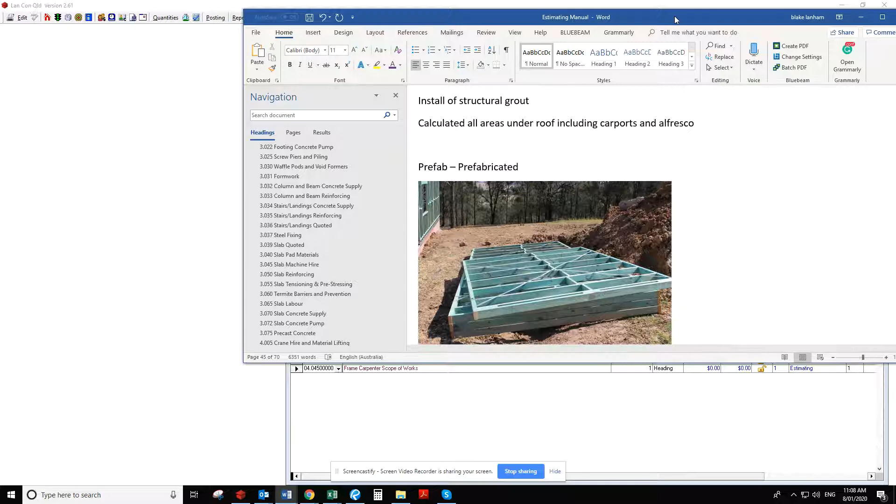A prefabricated frame is one that comes out in sections. It's much faster to build the house frame on site, so the labour costs are lower, but it's slightly more to purchase in the frame timber cost centre.

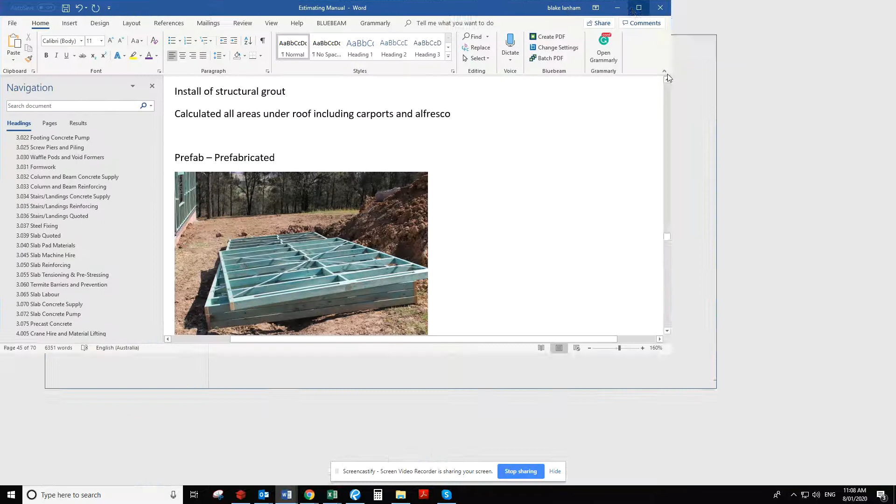The alternative is stick framing, where all the panels are individually cut on site and installed. This is a much better product for complex building sites, particularly when there are very different levels.

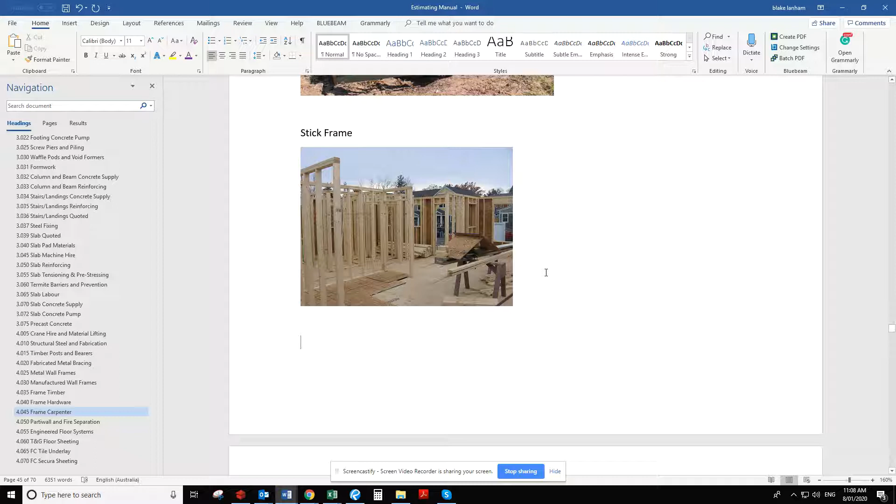This allows the carpenters to put the frames together. It does take slightly longer, but it's cheaper from a material point of view, though higher from a labour cost.

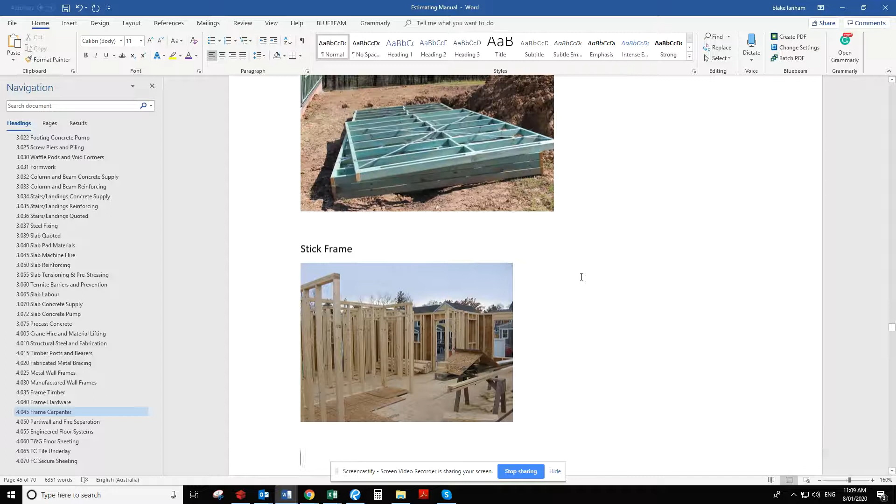Sometimes when you have to make modifications to something that's already prefabricated, it can be quite tricky and take a lot of time. So when we've got complex sites, sometimes we go stick frame. As a general rule for the Lan Con standard homes, we just go prefabricated or prefab frames.

You'll see we have quotes here for prefab lower. This house is 2-storey, so it has a floor system, a prefab upper, and then roof trusses. So if we go to the Frame Carpenter purchase order...

Here we'll just double check this bill of quantities. This one was done up by the sales estimator for a project. Now that we've actually come to construction, we just need to double check these quantities.

On this particular house, we have quite a few different levels. So the first section of prefab we'll calculate at 2700, and the next section we will calculate at a higher rate. Upstairs is all the same through the middle, except for this top parapet here.

So the first item is the lower story frame up to 2700 high. This is taken from this area at the front here.

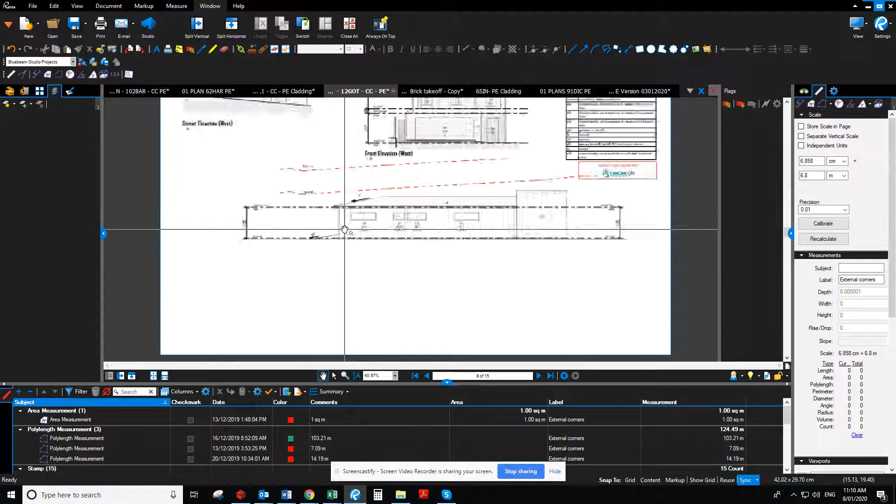Now to set up your scale on Bluebeam, you just hit Store Scale in Page Calibrate and click on 2 points, and it's 2.59.

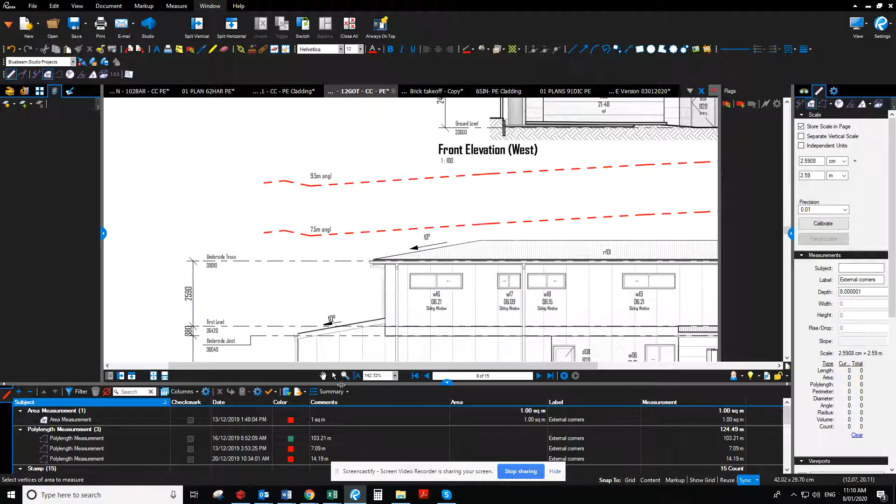Now this back section here, you can see from this point to this point is as per plan. So it's always good to just double check that the plan is correct.

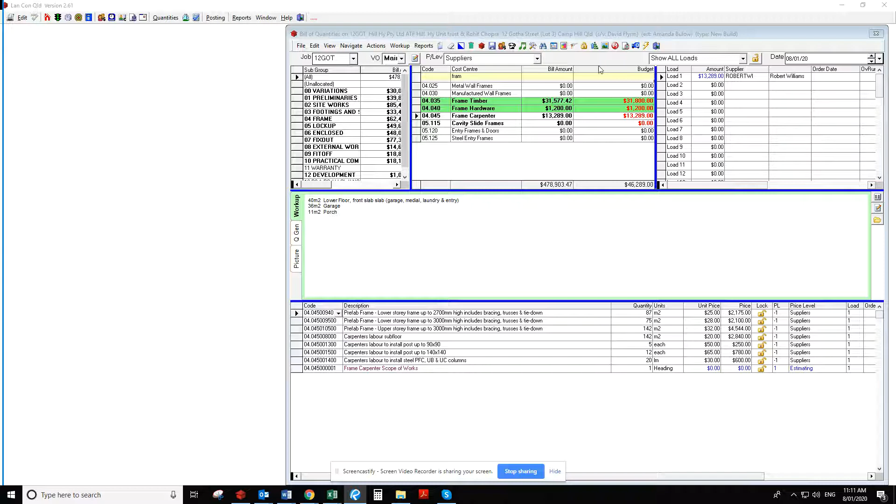So we'll have to do the lower section at a higher rate, which the sales estimator has put in as 3. That is actually the highest standard rate for this one, so I agree with that.

So what we'll do is go to the ground floor plan and double check this area. I've already got a scale saved on this page because I've done previous estimates.

So when you're doing this measurement, you want to take all areas under roof. If you see this outdoor area is all covered, that needs to be included in your calculation, because it covers any of the trusses in this particular outdoor area.

You can see here that it's under a roof line. So we don't pay separately to install frames and then additionally pay for roof trusses. This covers frames and roof trusses.

So I'll just work out the area here and we'll double check that. Outer corner, outer corner, outer corner of the post, outer corner of the frame, and the bottom of the stairs there. So that is 72.

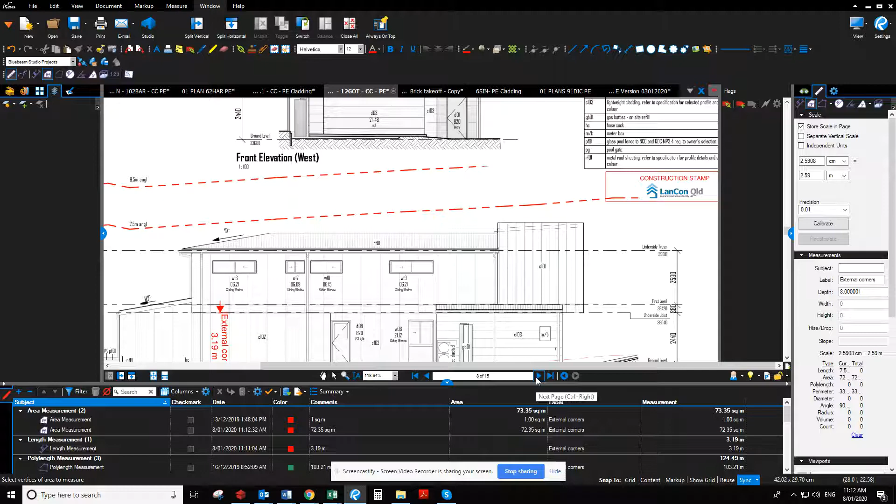So I'll just change that to 72. That was outer corner, outer corner, outer corner of steel post, outer corner of frame, and that was the lower area that you can see there on the plans that needs to be done at the higher rate.

Then we move to the front of the building. You can see here that the front of the building is at a lower ceiling height. So we'll go back to the plans, and we've got the scale already marked.

We go to the area calculation: corner, corner, corner, join up there, corner there, and again this is under the roof, so we'll go to corner there and press enter, and that will give you the external corners there. So that is 81.

Okay, so we've checked that item. Now we need to go to the upper story frame to 3 meters. Looking at the floor plan, the ceiling height is 2.59, so we can use the prefab up to 2.7. We can use that item there, and we can delete that one out.

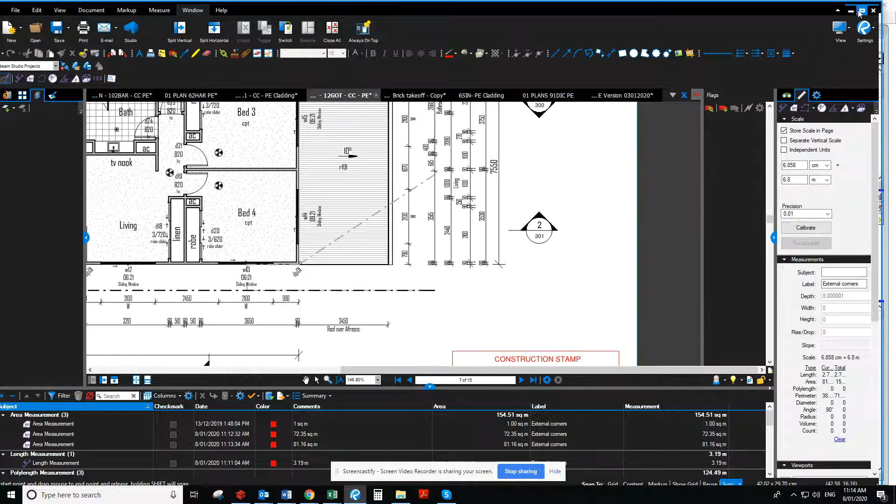So we've got the upper floor plan here. I need to set up this scale. I'll go to calibrate, and this one's nice and easy to take. So 2.1 is 2.1 there.

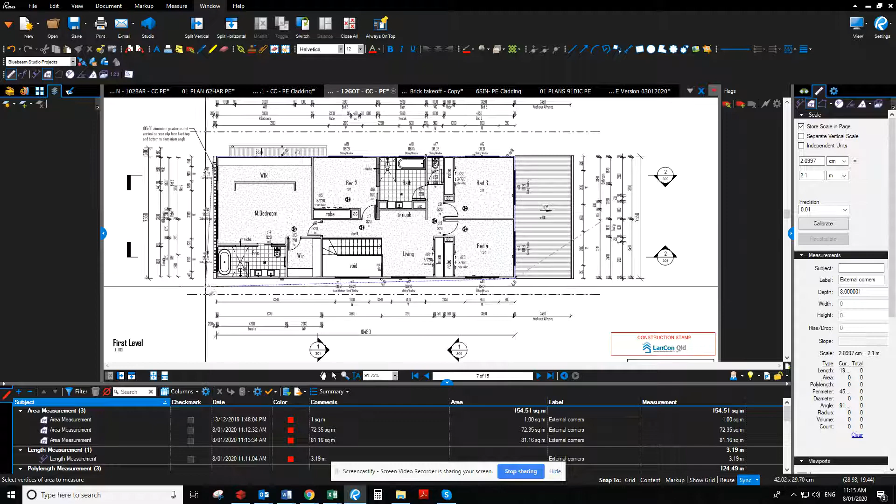So then we'll just double check the area. Outer corner, outer corner, outer corner, outer corner. So that's 140. I'll change that to 140, and I'll change that to be -1, which is the supplier pricing, as we've got a supplier here and we're actually issuing the purchase order out to this supplier. The next item is the subfloor.

Now there is a subfloor for all of this level, and we also just need to double check. This has a drop edge, but you often need to check that part of the house isn't on a floor system as well. If this house was raised up off the ground and not all slab on ground, then you would need to add in an additional subfloor for that area. So the subfloor here is actually the same as the upper, which is 140.

So now we just need to review the posts. You can find out what size the posts are from the Keynote legend here. So we've got 75 by 75 steel posts and 90 by 90 square posts.

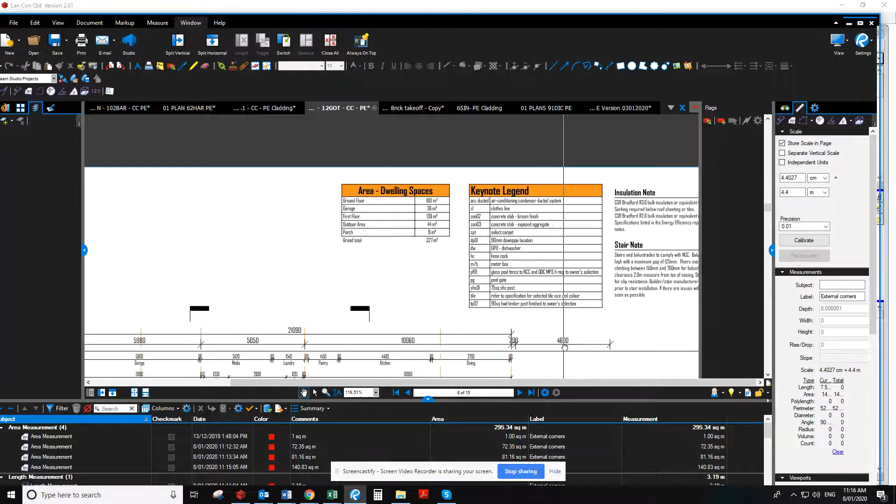Okay, so we actually have a count function within, you've got your legend up the top there. What I might do is select all of these and move them off to the side just so that we can see a bit clearer. So we can work with the count function on the measure, and we can label it over here post quantity so that we can find it nice and easily.

So now that we've got that, we can just go around the house. I like to start in the top left. So you've got 1, 2, 3, 4. That's all I can see on the lower floor, and now we'll go to the upper floor.

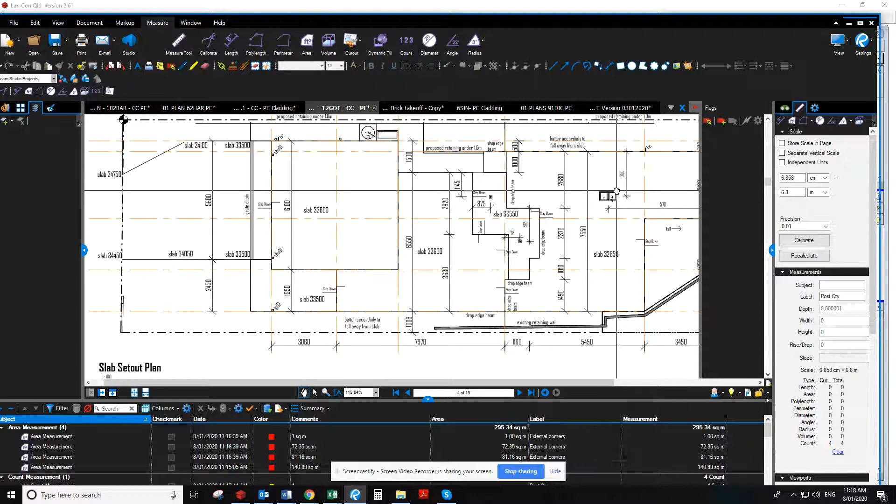So I can only see 4 on there. Sometimes we might have additional information here, additional steel posts we can't see. Okay, well, I'm happy that that is 4. So I'll do 4 there, and I'll just delete this note. Okay, the next item is

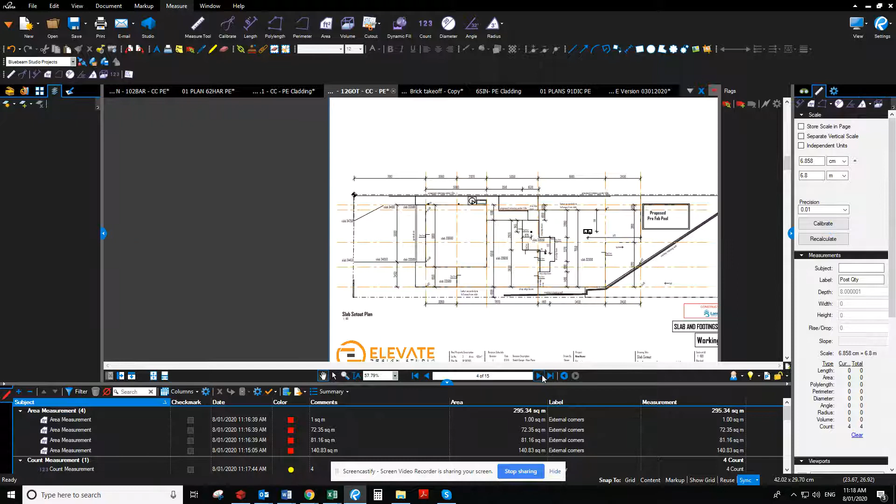a 140 by 140. So this is obviously an item that has been removed. We don't have any 140 by 140 posts on this house anymore. So this is just all an aluminium screen to the front facade. Often those posts will be used as feature posts to the entry.

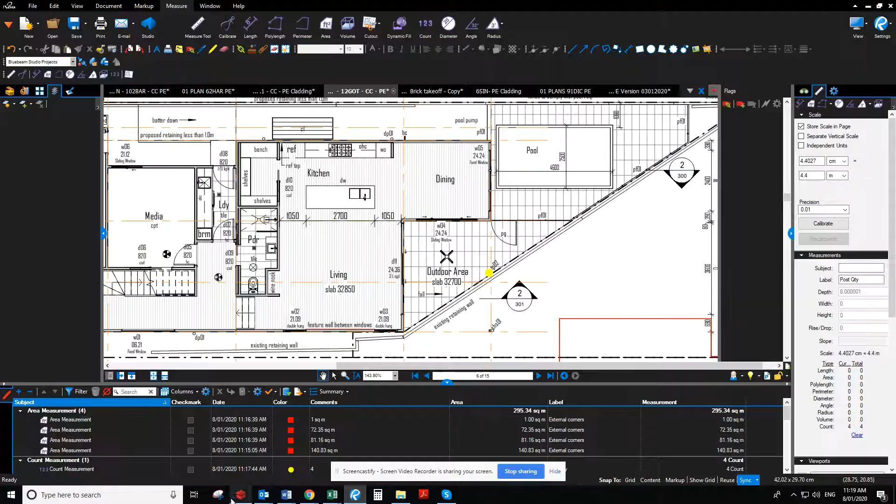Right, so there's our 5th post there. Okay, so we'll go back and change that to 5, as that was the other steel post, and we'll delete that line out. Then we have steel columns.

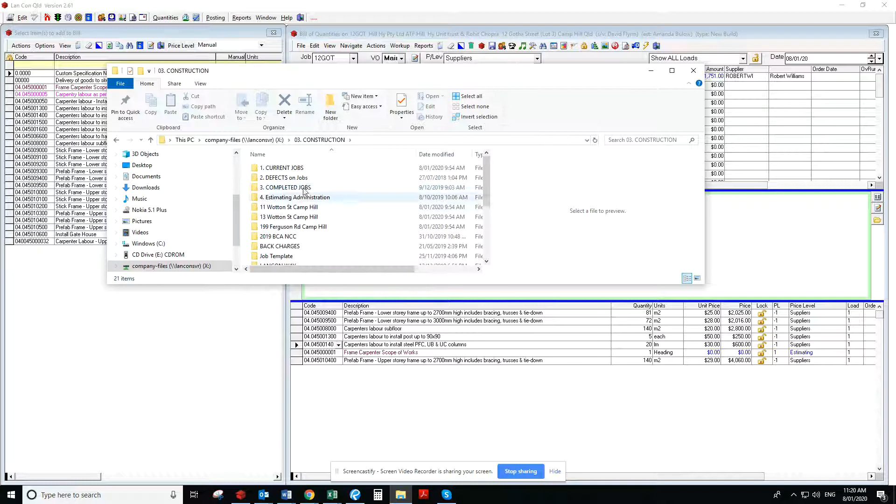So for this job, I believe we do have the engineering back now. So I'll just go X drive, construction, current jobs. This job is number 12 Gotha Street, and all of our construction documents should be in specifications and colour selections, so we haven't got anything saved in there at the moment. So I'll go to the plan bag and check in the engineering folder. So we do have engineering in this folder here.

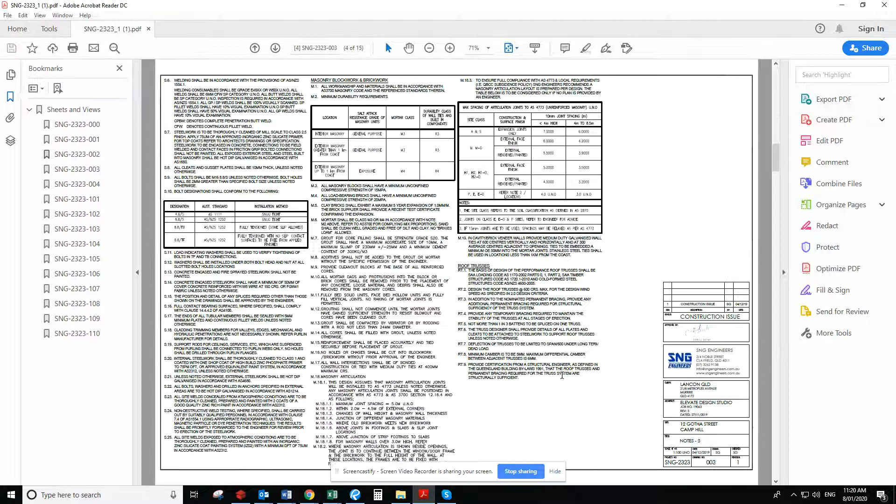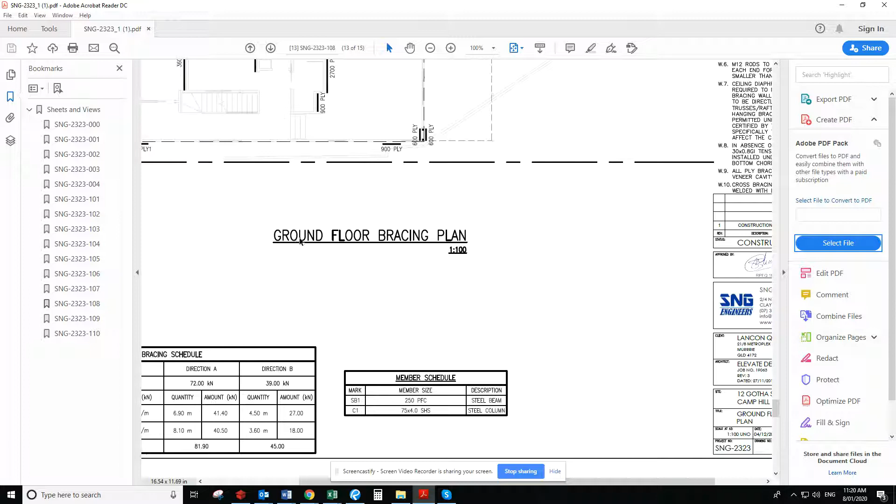So we've got some steel beams and steel columns on the ground floor plan. I'd imagine for this house that we would just have a steel beam across the garage there at 4.8, which is the garage opening size. We'll have a look on the next page, and there's no steel there.

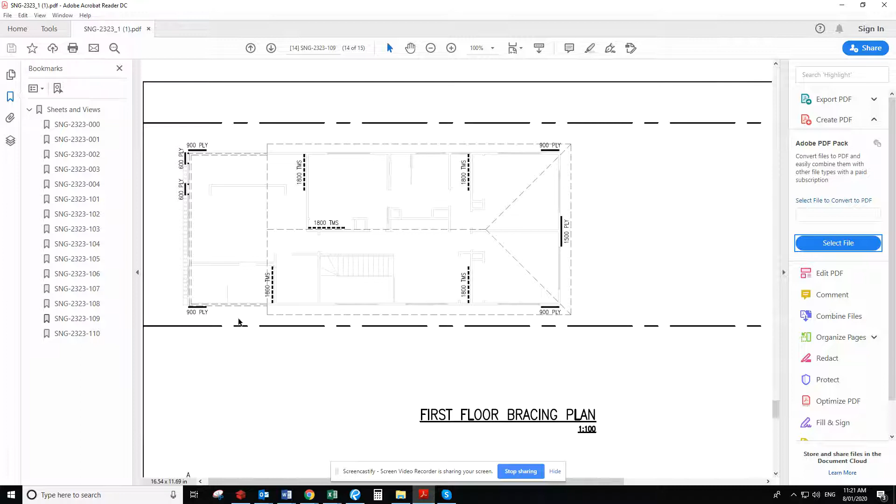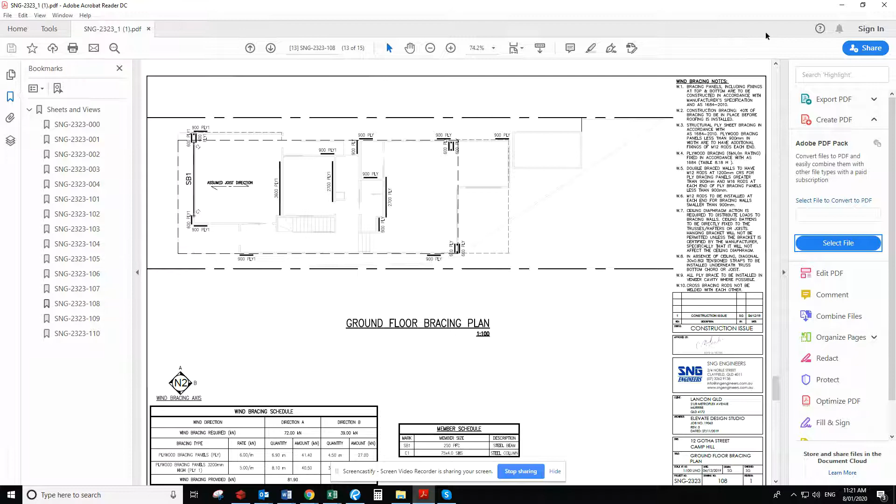That's all been, that note has been removed. So if we go back up to here, it's all just ply bracing, and the steel columns are not marked on this plan, but we have them on the architectural plans. Okay, so we'll just add one there at 4.8.

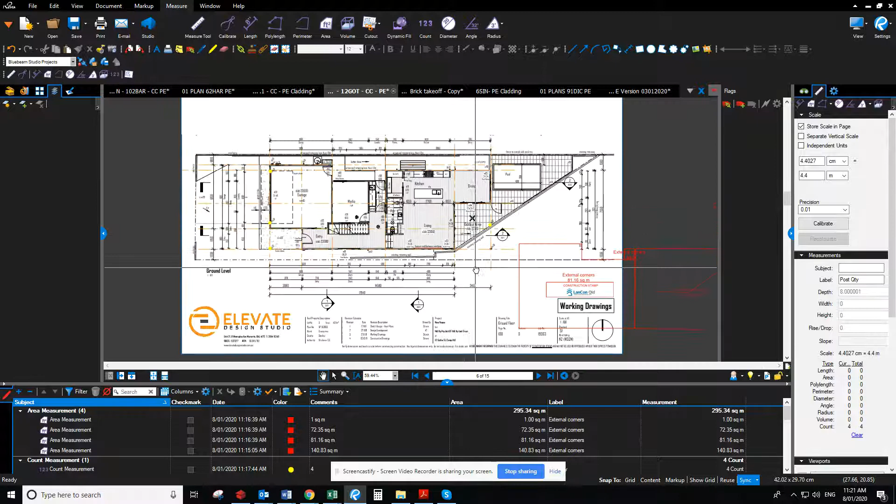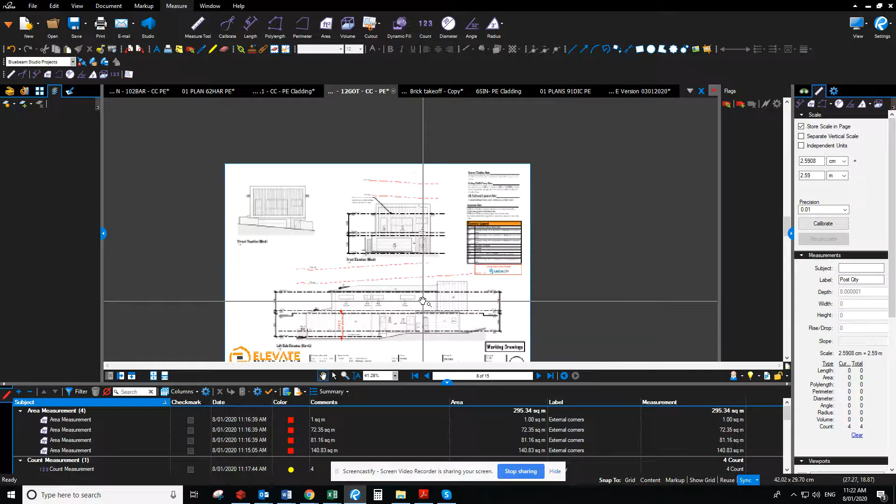Now we do have an additional amount that we need to add in. For this particular house, we do actually have cladding above the standard square meterage. So for any areas like parapets, anything that actually extends above the standard - if you look at the elevations here, you can see framing here actually extends above what we've agreed to pay. So we need to include that area.

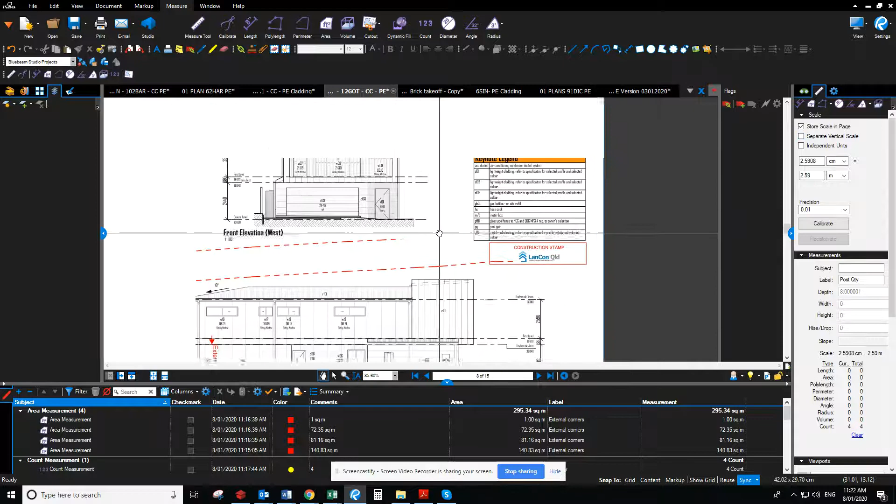Anything over what we have originally allowed. So we've got a scale set up for this page. So I'll just calculate those areas here.

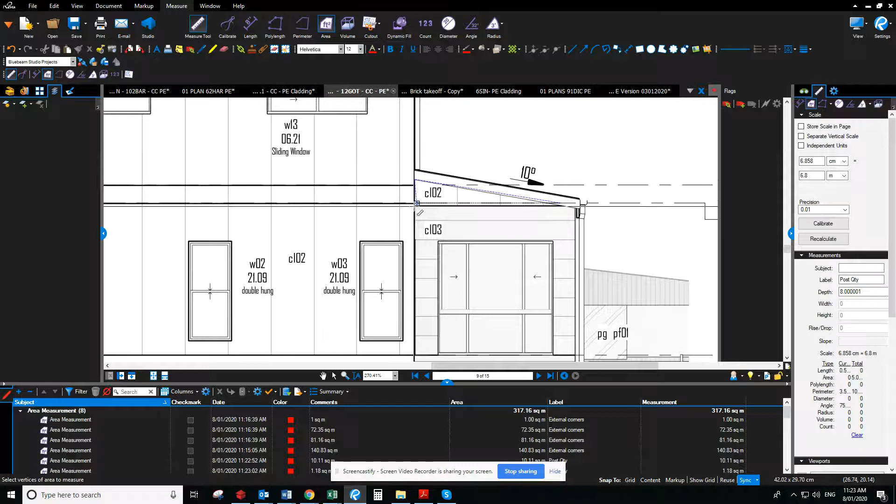All right, so we'll add that in as an extra into our bill of quantities. So just go into the catalogue.

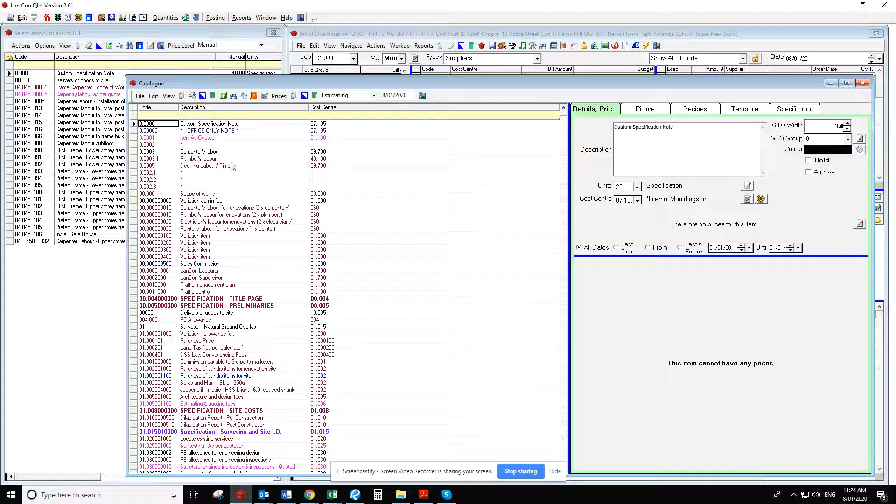And I will copy the current item to 04.045, 010600. No, okay, I'll need to double check which one's available. Oh, that's the gatehouse. Okay, so I will copy the current item 04.045, 010550.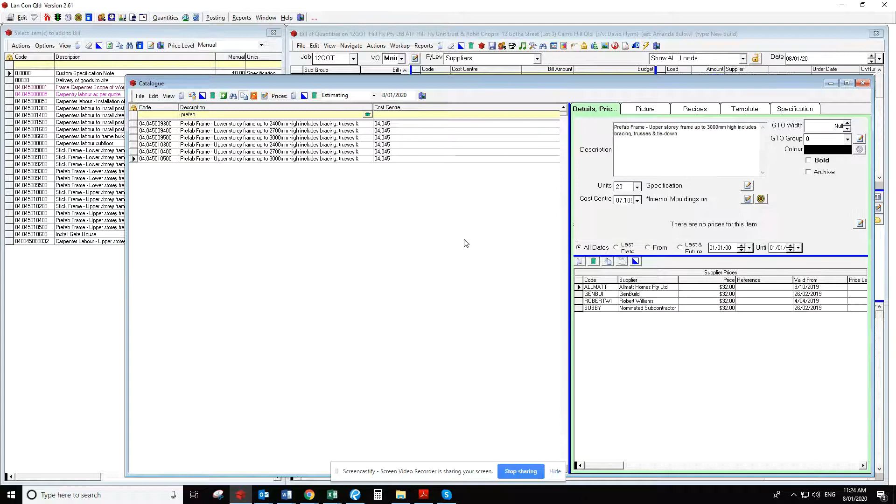So this is additional area. Okay, so this one here is $11 a square meter. That's all correct. The template is...

Click out and back in, and here we'll go in and we'll just set up our vendor pricing. So if we add supplier, now your supplier code is in the top right there. It's not case sensitive, and we'll pop that in at 11.

I'm also going to pop in our other carpenter. Their code I just know from the top of my head, so we'll pop that one in there. So both of those carpentry gangs' pricing is saved, and I'll update that one to 11 and that one just to 15 at the moment so that we've got a price in there.

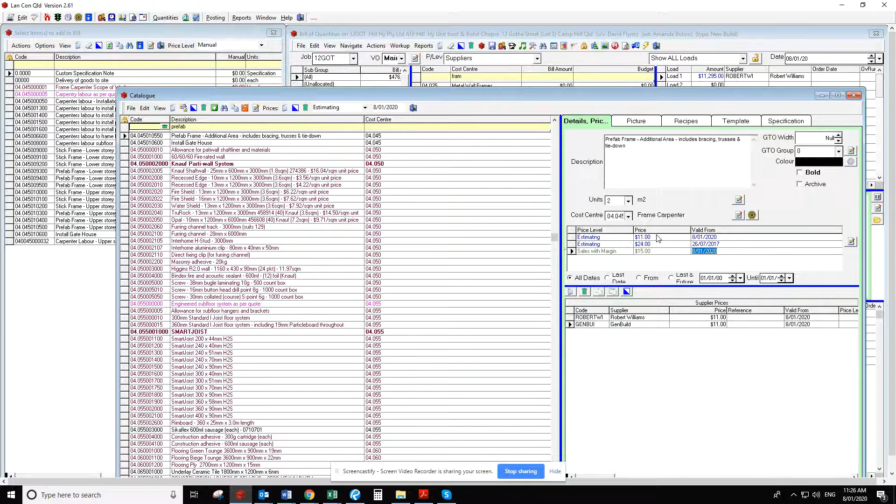Okay, so I'll close that. I'll be able to refresh this. Now that additional area item is there, and we'll just add that one up.

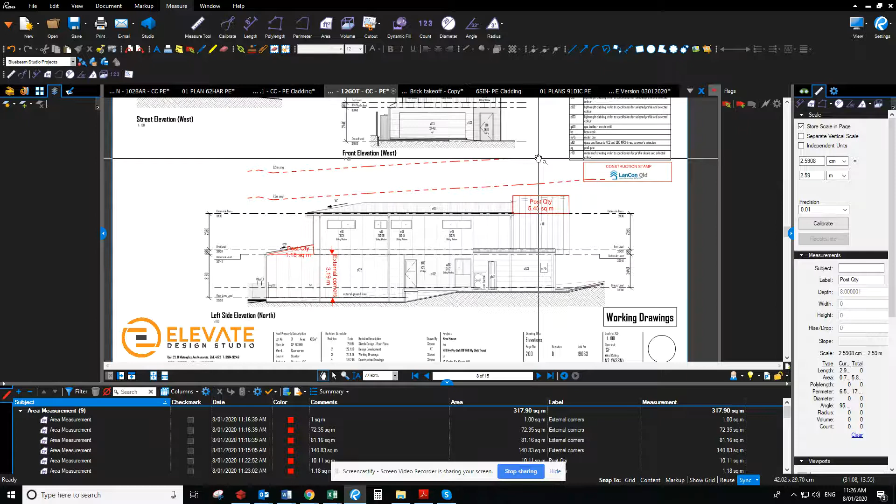So based on the plans, I've got 5.08 plus 0.74 plus nothing additional at the back there, 10.11 at the top, 5.45 there, and 1.18.

So that is 28.38 square meters additional area. And we'll change that to -1 because that now has supplier pricing.

So that is all the items in here. Generally, unless the plans clearly indicate where bulkheads are going, we can't really put that item in at this stage.

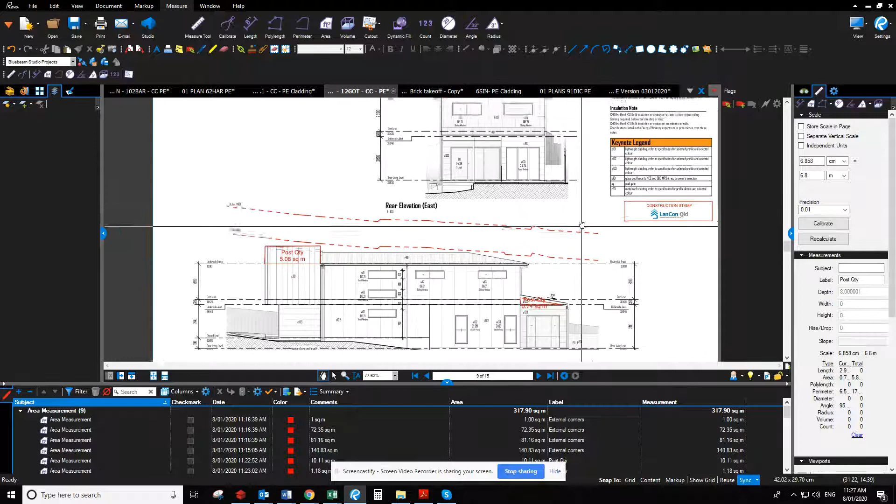So there will be a bulkhead through the front here. So we can put that one in.

Great. Now, if ever you put in supplier pricing and no price comes up, it just means that that particular vendor hasn't been set up yet. So you can just go into the catalog and add their vendor code in and the price, and then that one will appear for you.

Now I'm just going to select all those items, go green arrow, and that will just update any of the text. And then we'll just select that one there and issue the purchase order.

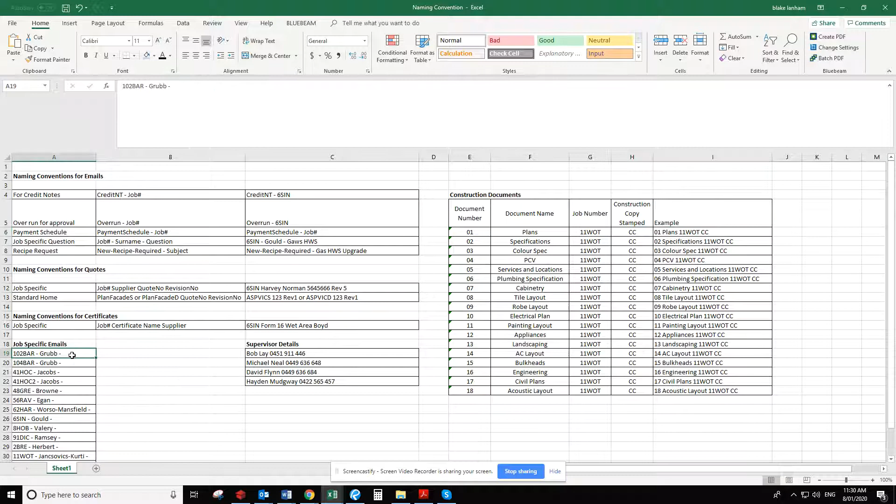Right, so in the naming convention, you can see that we've got a job specific email here. So I'm just going to go select that line here and go construction documents so that Rob knows what job it is relating to.

Then I just go into the server. Now we did just have the engineering open for that job, so I'll pop that there while we have it open.

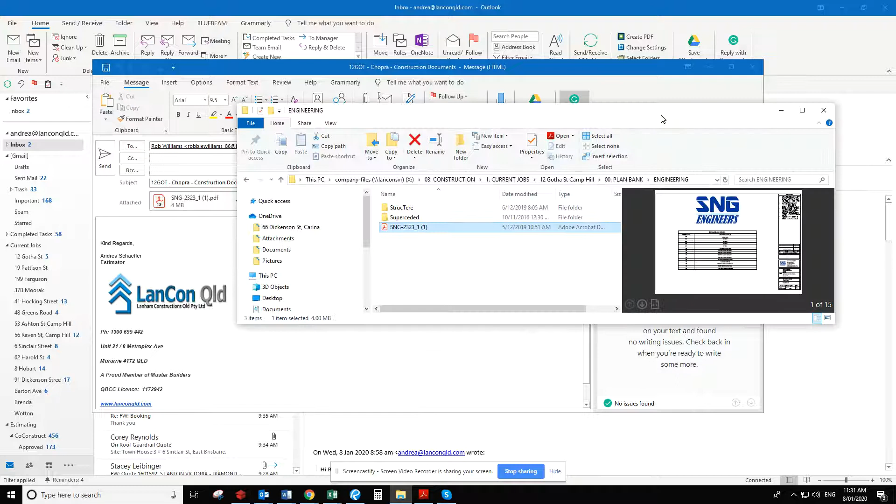Then I'll go into the actual current job, into specifications. So that should be the final set of plans there. We'll just have a look. That is revision E. So I'll just select revision E.

And then that's all that we can actually send out with this particular job. We haven't got anything else that's actually saved in the construction set. So I'll just go, hi, Rob, please find a...

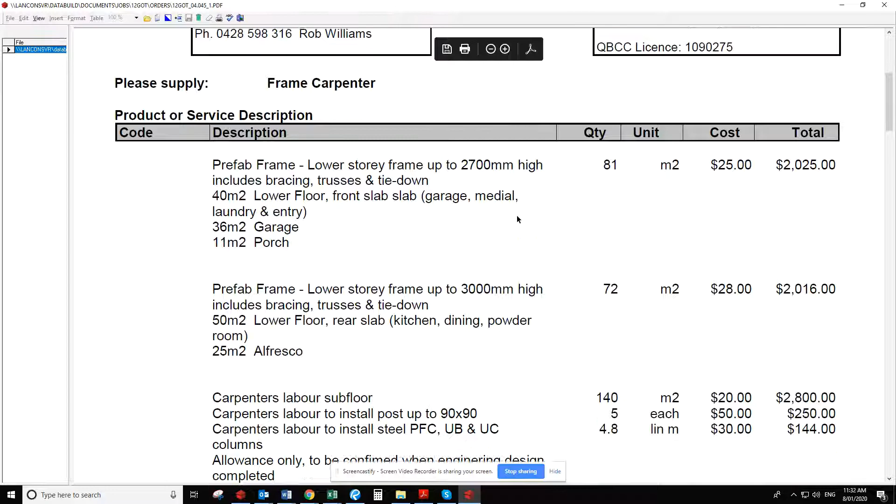Great. So now the carpenter has a copy of all the construction documents. Now, if you didn't have a copy of a supplier's email address, this is just a copy of the purchase order that you can see comes up so that you can just double check that it's as you thought it should be. So we'll just close that.

So you can load supplier. We keep the databuild suppliers up to date. So you can just type the name in there. Now, the construction manager will tell you on monday.com who they want, but you can find a copy of their email address and their name and contact phone number here if you need to talk to them or ask them a question in relation to a job.

So that is the framing carpentry purchase order issued and correct to site.